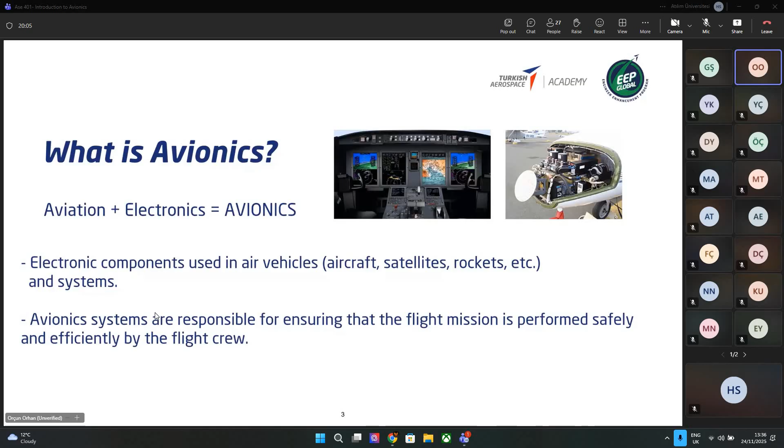A little bit of history. The Wright brothers, as you already know, are the first ones to actually make a successful flight with a heavier-than-air aircraft. It was the first one in the history of humankind, which is kind of important for us because with those improvements, aviation systems actually started to grow.

The second part is World War One. Why is it important for us? Because during World War One, there weren't many avionic systems used inside the aircraft. The pilot was trying to navigate through actual visual sight, and would just try to move the aircraft. Why they were using the aircraft was just to get information from the other lines, trying to understand what the enemy was actually trying to do, and then try to come back to their base and give the information. And then maybe some close combat, but there wasn't really much avionic equipment used in those aircraft in that era.

But the first important guy in history, we could say, is Lawrence Sperry, because we call this the first autopilot flight. Why we call it the first autopilot flight is because in 1914 there was an air show in Paris, France, and Lawrence Sperry had a gyroscope in his aircraft's system, with a lever connected mechanically to that gyroscope. During that air show, he flew his aircraft without actually controlling it. The aircraft was just moving in a stabilized way, getting its direction through the gyroscope. So in history, this is called the first autopilot system. It's not, of course, like the autopilot system we use nowadays, but it is a system controlled by a gyroscope, not by a human. That's the reason it's called the first autopilot flight in history.

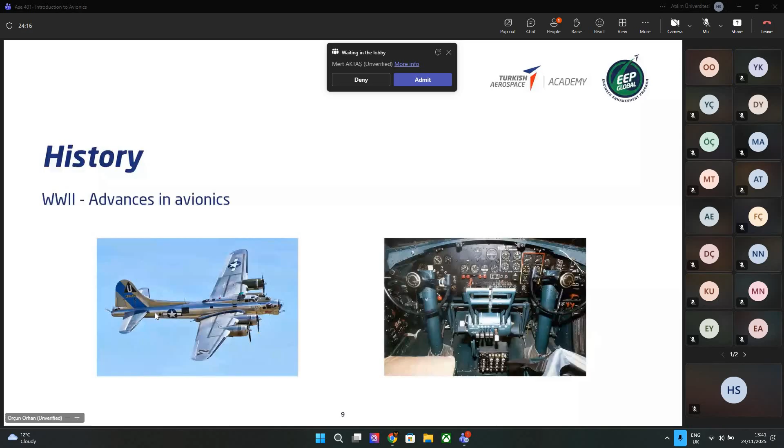Navigation systems, like the one shown in the right picture, also started to be used during the World War II era, and we'll go into a bit more detail about those during the course. But most of the systems we use nowadays also started being used in World War II, so that was an important era for avionic systems.

Fly-by-wire, why do we call it that, and why is it important? Is there any question? No, I think it was a mistake. Okay, so I'm continuing then.

Fly-by-wire is also important. Before fly-by-wire systems, all control surface controlling and aircraft systems were controlled mechanically, not electronically. But when fly-by-wire systems started to be used, like in 1987 in the Airbus and 1994 in the Boeing, controlling systems started to become electronic rather than mechanical. You give mechanical control inputs, but every surface is commanded by electronics.

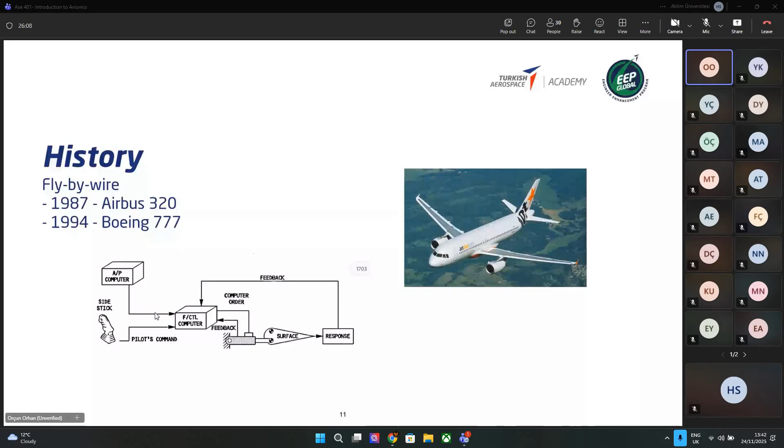Another important part is GPS satellite navigation. Why is it important? Before GPS, we were always trying to get our navigation through the ground, using beacons on the ground to understand our location in the air. But with GPS, we started getting our location through satellites in space. This was an important era for navigation, and it improved location finding for aircraft more easily.

In today's conditions, we can say it's not possible for an aircraft to fly without avionics, because we have fly-by-wire systems, motors, and everything relying on avionic systems. If there's no avionic system inside an aircraft, it's not able to fly. So we can easily say it's not possible for an aircraft to fly without avionic systems in today's conditions.

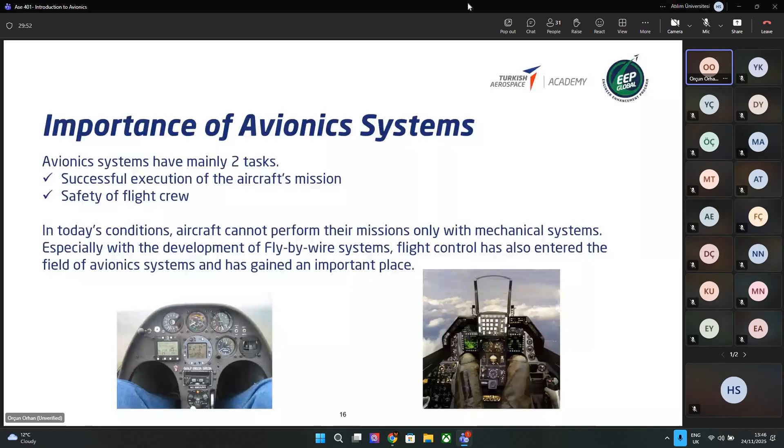We have the ATA classification, which is the avionics system classification according to the Air Transport Association. There's a numbering system for specific systems. For example, ATA22 is the automatic flight control systems. ATA23 is the communication systems, with subsystems like radios, locators, and radio control panels. ATA34 is the navigation systems, including radio navigation, inertial navigation, landing and takeoff systems, or air data systems.

Why do we do this classification? Because aircraft are really big, you need to classify subparts so that when you're designing, you understand what parts you're designing, and there's a common sense. This is why we use the Air Transport Association's classifications for our aircraft designs.

So what is control theory? In the basics, control theory is about building a controller to control a system. There should be a system designed before you, and as a controller, you try to create a controller on that. What the controller tries to do with a given input is get that system to a desired output. For that, there should be sensory systems that can give feedback. If there are measured outputs with those sensors, and it's fed back to the reference, that means this is a closed loop.

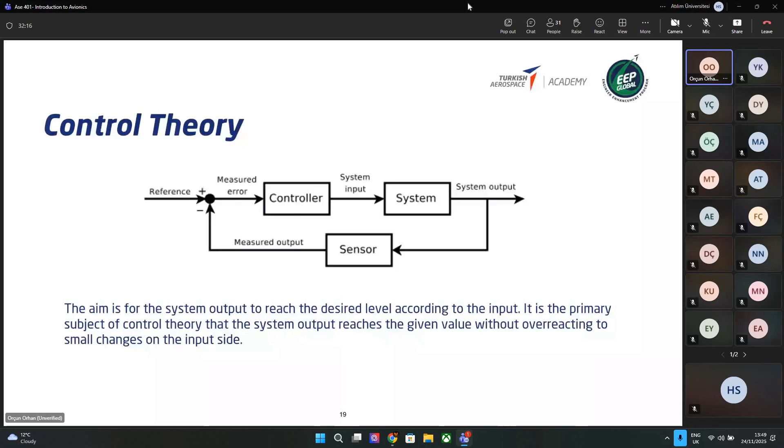For our systems, what the controller is actually trying to control are the control parameters, which are the elevator angle, rudder angle, aileron angle, flap angle, and the thrust quantity. These are the control surfaces and the motors. With that information and those inputs, you will actually try to control your aircraft in the air.

So what is a cockpit? Actually, the cockpit is the section where the aircraft is controlled and managed. It could be on the ground for UAVs, or inside the aircraft for fighter jets or other aircraft. This is the area where all the aircraft information is shown to the pilots. Through feedback sensors or screens, we give all that information to the pilots so that they are able to fly the aircraft.

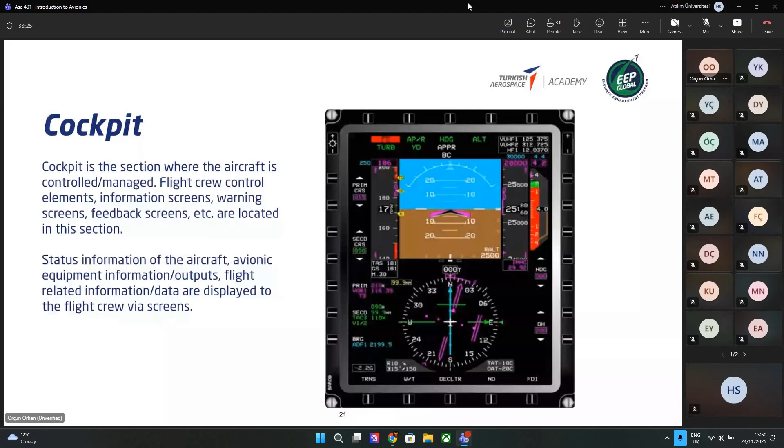Through history, there is a simple T organization that is used in the old times, but also nowadays. We just try to follow the simple T organization in those screens that we are giving information to the pilots. What is the simple T organization?

There is a T shape. All this information is shown to the pilots. On the left side will be the airspeed indicator. On the right side, there will be an altitude indicator. In the middle, there will be an attitude indicator, and then the heading indicator. So all four pieces of information are shown to the pilots with a T organization.

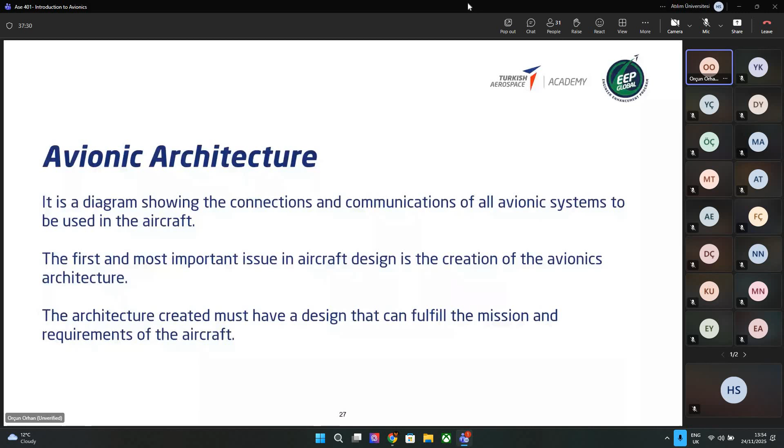So the paths followed while creating the aircraft, as we always say, start with examination of the aircraft mission and requirement set. According to that, you determine what equipment you are going to use, then select the suitable equipment that can fulfill the specified functions, and determine the data paths between the selected equipment - which equipment gives information to what, and how those equipments get their power and from where.

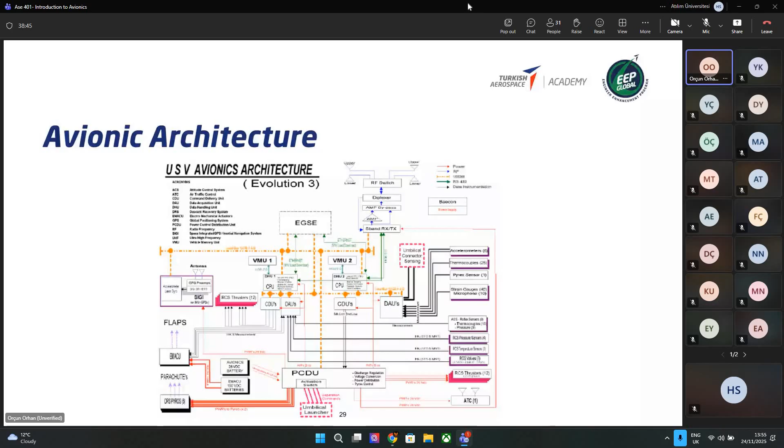So today we are categorizing all of our avionic architecture into three main headings. First one is the central architectures. The second one is the federated architectures, and the third one is the modular architectures. But there is also another one, distributed architecture, which we are not using anymore in our aircraft, but this is the old way that we were using.

So what is a distributed architecture? It's the most primitive and simple type of architecture used in aircrafts. There is no connection and communication between the avionic systems. The only connection between the avionic systems is the human factor, which is the pilot. So all these systems are just separately showing information to the pilot, and the main processor in the aircraft is the pilot. He's processing all this information and then making a decision about what to do, how to control the aircraft, how to control the control surfaces or the motors, and then applying them through using some mechanical levering.

So there is no connection between the systems. No system is giving any information to each other, only giving information to the pilot. That's why we say that it's distributed. Everything is distributed and then gives information separately to the pilot. So in this architecture, the main part is the pilot. He's the main guy.

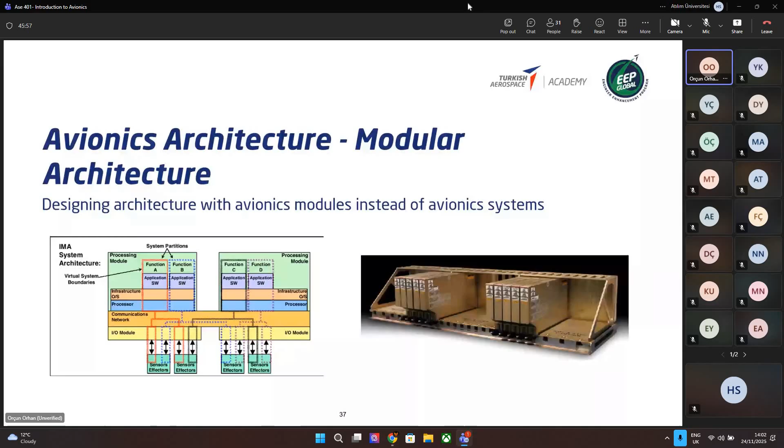You can think of it like the IT department of your system. There are modules, and if there's a failure in a module, it will be easier to debug and you can easily change them. But of course, in nowadays architecture, it's not just modular architecture or only federated architecture — there are combinations. In the aircraft, there are still some modular architectures, federated architecture, and also some central architectures, all combined together and used in aircrafts.

So data buses, we will start talking about. What is the data bus? As the name already tells, it's the channel that is used for the avionics systems to give information to each other, to communicate. It is like a nervous system, you can say — all the communication and data transfer is carried out through these channels.

If there is any failure in the system, in the communication, then there is no information going through from one system to the other. So there should also be backup channels for every data bus, because if you only have one data bus between one device and another, and it's an important data bus for your information, if there is any failure in that data bus, there is no way to give that information to the equipment that is needed. But if there is a backup channel, then if there is any failure in the main channel, you can send your information through the backup channel. So there is always a necessity in the aircraft to design with backup channels, with backup equipment.

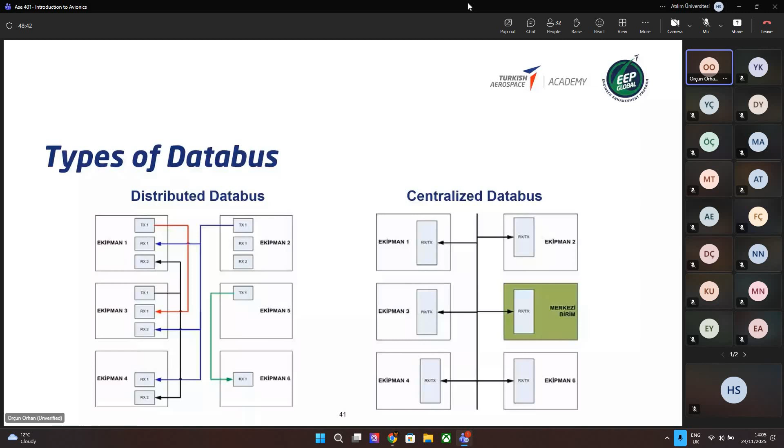But what is the centralized data bus? There is only one data bus in your system — only one line, one channel — and all the equipment is actually connected to that channel to give and get information. Instead of distributing and dividing every connection separately, we are centralizing every connection in the centralized data bus.

So what are the advantages? It's standardization, fast data transfer, easy and fast implementation, and ease of error tracking.

Because if you have multiple wires connected between different equipments, it will be harder for you to find a bug. If there is any problem, you need to follow the cable from which equipment is actually going to where, and then understand if there's a failure in that part or any other parts. So it will be harder to detect a bug. But in the centralized one, because every equipment is connected to the same line, it will be easier to understand what the failure is.

So in aircraft systems, there are generally 2 data buses used. The first one is the military standard 1553, and the second one is ARINC 429. We will just talk about it a little bit, we will not go into details.

The first one is the military standard. As the name suggests, it is a standard used in the military, developed by the US Air Force in 1973 for faster and easier data transfer between systems. You can see it used in the F-16 aircraft, and some other versions are used in F-16s or the Apache helicopters. This is the standard used in the military.

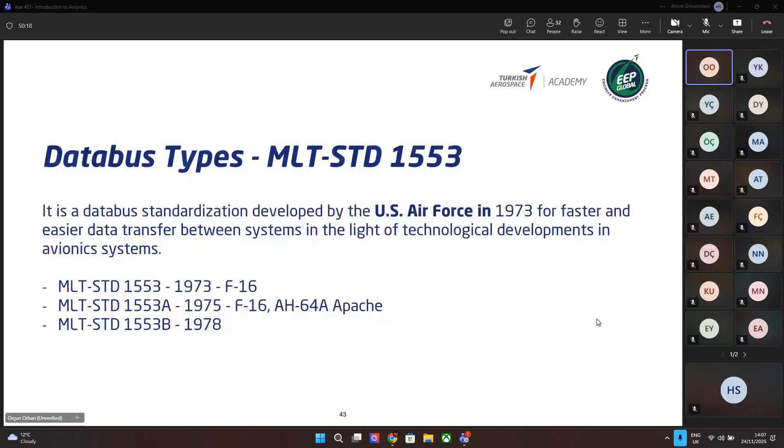Let's not get into too much detail because it will be too confusing. But what is important is what we call a half duplex system. So what is a half duplex system? Through one line, at the same time, data can only be sent in one direction. So if one equipment is sending data to others, you cannot send information back through the same channel. This is what we call half duplex.

But if the technique is full duplex, then you can also send information in both directions.

So what we are doing is at one time, only one system is sending data from one place to another, and this should be controlled by some entity. This is why we have a bus controller, which controls all the bus. It sends signals to the equipments to tell them which equipment needs to send data to where. So at one time, only one equipment can send information through that bus, and there shouldn't be any information sent back to the same equipment at that time.

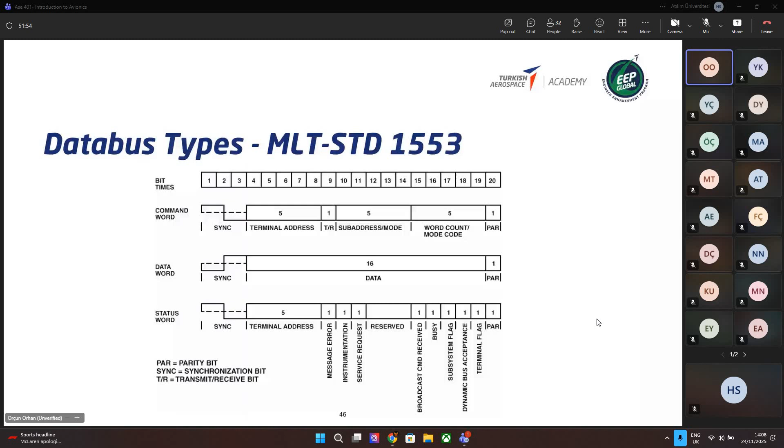Let's go over those - these are kind of the details of the system, so you shouldn't go too deep. So what is ARINC? The second data bus is the communication protocol used for civil aviation, not military aviation, because using military aviation standards in civil aviation is kind of expensive. So they came up with a much simpler protocol to be used in civil aviation.

So in the military, there should be a controller actually controlling which equipment is sending the data. But over here, there is no controller - there is only one transmitter in the system, and this is the only one sending information to the others. There could be some receivers, up to 20 receivers connected to the system, but only the transmitter is sending data - the receivers are not sending data. So this is much easier and much less complex design compared to the military standard protocol, because in the military standard there could be a controller controlling the system.

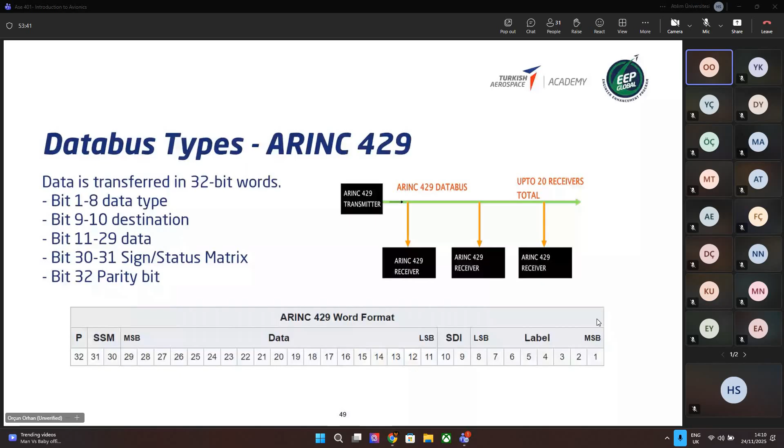So as we said, these are the two data buses used generally in the aircraft. Military standard is used mostly in the military section, but the other standard is used in civil aviation.

So let's start talking about the avionics subsystems. What are they? They are the human-machine interfaces, like the display systems, communications, and data entry control, flight control systems, because there is an interaction between the human and the machine. The machines will be the screens or the controlling parts, like joysticks that you're using to control your aircraft, or screens or keyboards that you're using to enter information into your systems. This is why we call them human-machine interfaces, because there is interaction between the human and the machines. The other subsystems will be the air data inertial systems, the navigation, the communication and surveillance systems, and the automation systems.

First, we will talk about the air data and inertial systems. This is the information necessary for the flight crew to perform its flight safely. This is the most important data that a pilot needs during its flight. We categorize them under three main sections: the first is altitude, the second is airspeed, and the third is air temperature.

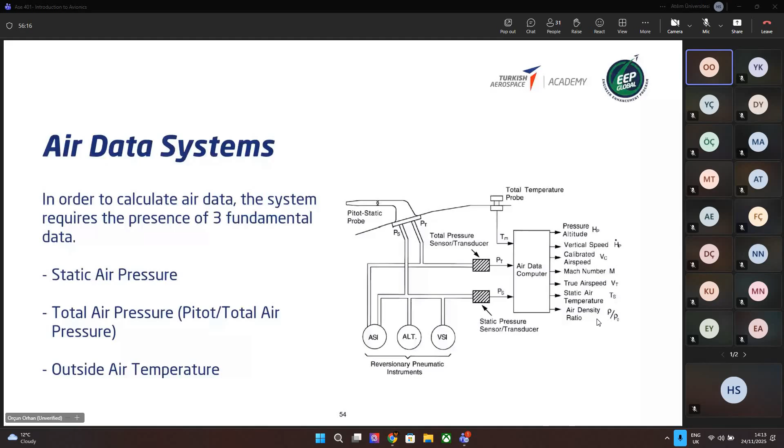So as we already said, this is the pitot tube that gets the air pressure information, and then a temperature sensor that is used to understand the outside temperature around the aircraft. These are some of the air data computers used in some projects, also in TUSAŞ and other companies.

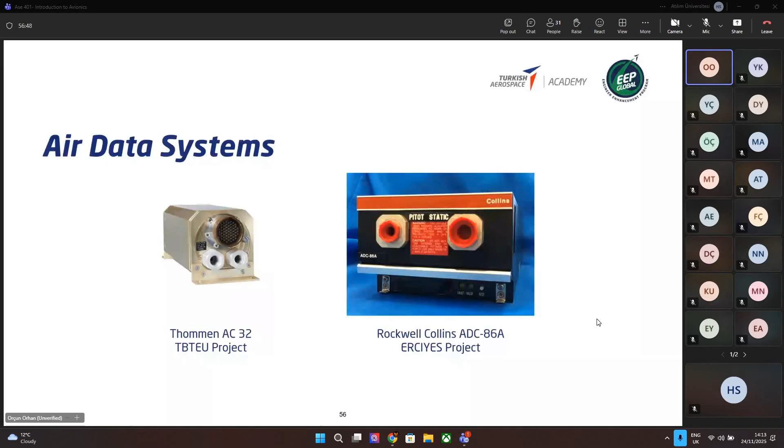The importance of this data for the flight crew is that with the calibrated speed information, the dynamic pressure on the aircraft can be obtained. From this, the forces and moments acting on the aircraft can also be calculated. So when pilots are controlling the aircraft, they try to understand how it will behave if there are more forces coming from one side, the wing, or the tail section, and will perform a maneuver according to those forces. So the controllability of the aircraft is affected by that data.

The altitude information is also important for a safe flight, because some aircraft crashes have happened due to wrong altitude data. If the pilot doesn't know he's flying really near to surface areas, whether it's a sea, a mountain, or any landscape, and doesn't get any information about the altitude or any vision from the outside world, he cannot understand how he's actually flying. There have been accidents in the past where the pilot doesn't get that information and then crashes the aircraft. So this is really important information for pilots to fly the aircraft safely.

Again, this is important not just for the pilots but also for the subsystems, because the subsystem also uses this air data information to calculate other information and then show it to the pilot. The reasoning is the same: if you're getting wrong data, your calculation will be wrong, and you will show wrong information to the pilots, which will affect flight safety.

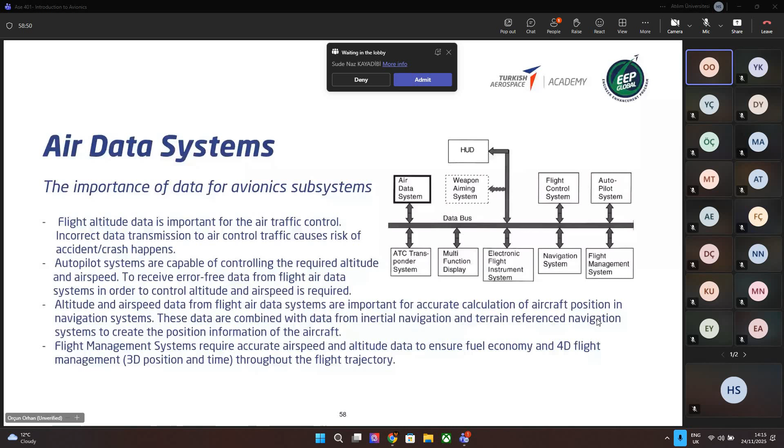There's an inverse relationship between altitude and static pressure. If you are gaining altitude, the static pressure that you're inside will actually be decreased. The reason is that there will be less air on top of you, so less air is pressurizing you. That's the reason for the decrease in static air pressure if you gain altitude.

There are two types of altitude values. The first one is the barometric altitude. This is the altitude measured with reference to sea level. So whatever you're calculating for barometric altitude will be your altitude according to sea level. After the aircraft lands at the airfield, the value taken from the barometric altitude will be the altitude of that airfield.

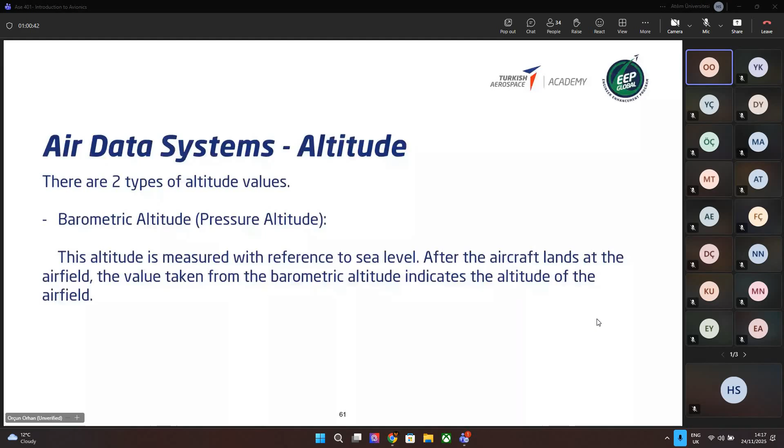The second one is the barometric corrected altitude. For example, if you don't want to get an altitude value according to sea level, but to the airfield's altitude level, what you need to do is understand the barometric altitude of that airfield through the barometric altitude level, and then give that information to your system so it can directly calculate your altitude according to the airfield, not the sea level. This will be your barometric corrected altitude.

The airspeed, the most basic airspeed velocity, is calculated based on the difference between the total air pressure and the static air pressure. This is the generic formalization of that. The airspeed you are going to calculate will be in knots, and PT and PS will be the total air pressure and the static air pressure.

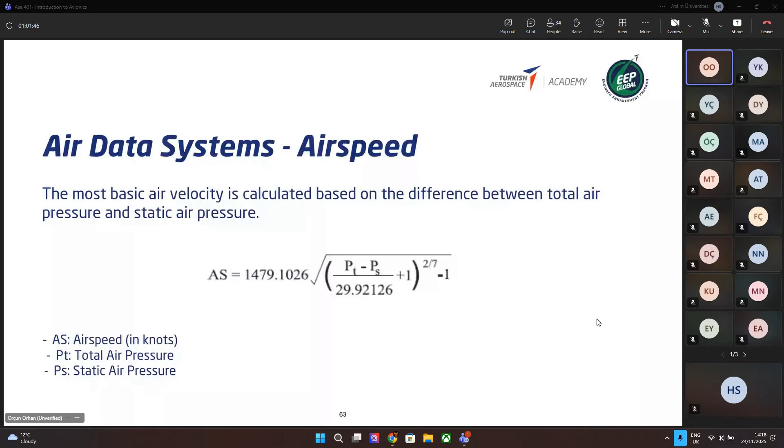There are 5 types of airspeeds that we use in the aircraft. The first one is indicated, the second is calibrated, the third is equivalent, the fourth is true airspeed, and the fifth will be the Mach number.

Indicated airspeed is the speed of the aircraft relative to the surrounding air mass. This is directly calculated using the static air pressure and the total air pressure shown in the first formalization.

When you want to use calibrated airspeed, this is the airspeed obtained by making aircraft-specific adjustments to the IAS information. You first calculate the indicated airspeed, then you calculate the calibrated airspeed. Those specific adjustments are like the pressure losses experienced according to the placement of the sensor. You're putting your pitot tubes around your aircraft, mostly on the fuselage part, but you don't know exactly if that information is correct or not. So with experiments conducted before the flight for your aircraft, you try to understand the correctness of the information through every pitot tube placed on your aircraft, doing that adjustment to understand the airspeed information.

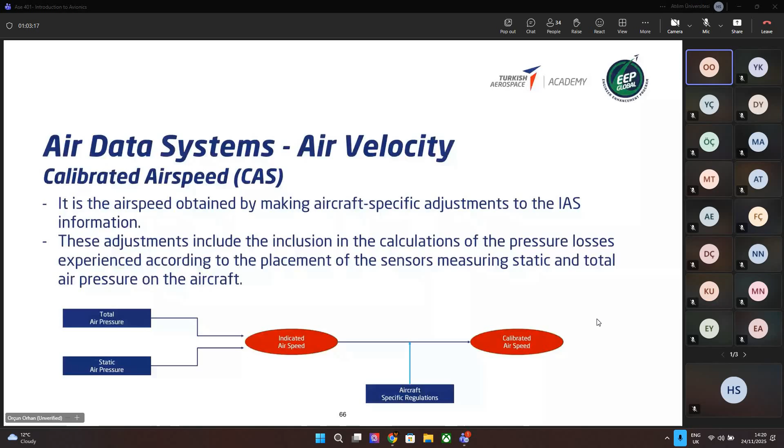The third one is the equivalent airspeed. This is a theoretical airspeed used by the aircraft designer, not by the pilots. The pilot doesn't use that airspeed to decide on anything. This equivalent air velocity is obtained by adding the density and compressibility data of the air surrounding the aircraft.

The fourth one is the true airspeed. What you're actually adding as the last piece of information is the temperature around the aircraft. When you add that information also to your equivalent airspeed, you come up with the true airspeed information. The last one is the Mach number, which is obtained by dividing the true airspeed by the speed of sound.

The air temperature is one of the 3 values that we need to sense on our aircraft through the sensors. There are 2 kinds of air temperature: the first is the static air temperature, and the second is the total air temperature.

Static air temperature is the temperature around your aircraft, so it's not going to change; it's just the air that has that temperature around you. But the total air temperature is, when your aircraft is actually flying through the air, there are forces also acting on the air around your aircraft, which actually heat the air all around it. So this is the total air temperature, not pressure, that you need to calculate.

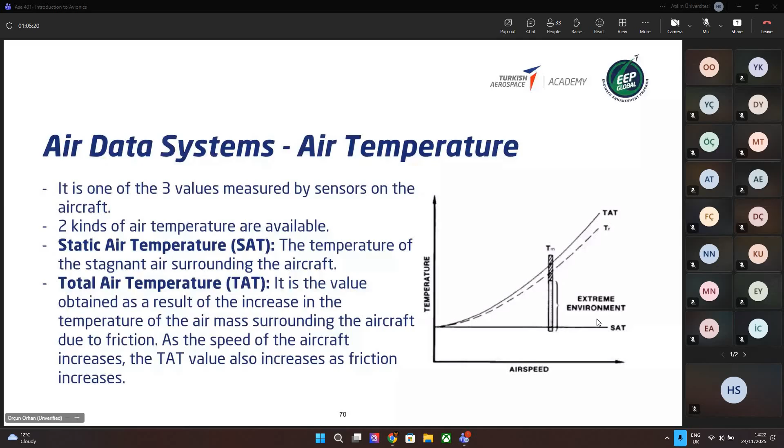Air data systems try to get three important pieces of information through its sensors. The first is static pressure, the second is total air pressure, and the third is temperature. All this information is processed in the ADC units to calculate velocity and temperature information for the pilots, and it is shown to them so they can fly the aircraft safely.

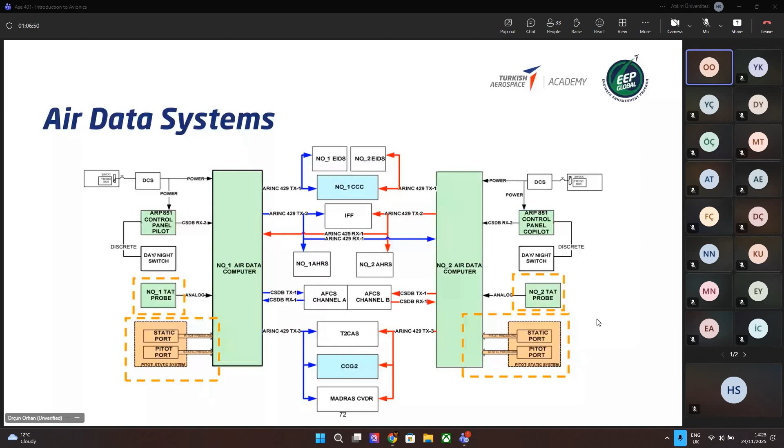Heading and situation information systems are what we call AHRS, the attitude and heading reference systems. Like the air data system, it provides necessary information for the flight crew to fly the aircraft safely. We categorize this information under three sections: first attitude, second acceleration, and third heading, the magnetic heading.

To calculate this data, we need different kinds of sensory systems, and the system receives information from three different sensors. The first is the accelerometer, which gives acceleration through three axes, X, Y, and Z. The gyroscope gives you the spin according to the same axes, and the magnetometer provides information on how your heading is relative to magnetic north.

For the heading and situation information system, the first is situation - how your aircraft is looking toward a certain direction. This is calculated by measuring the rotation around three axes. You get this information using the gyroscope, because it tells you how much your aircraft is rotated around one axis. With a gyroscope giving rotations around three axes, you get the situation information about your aircraft - in which direction it's rotated and in which direction it's looking.

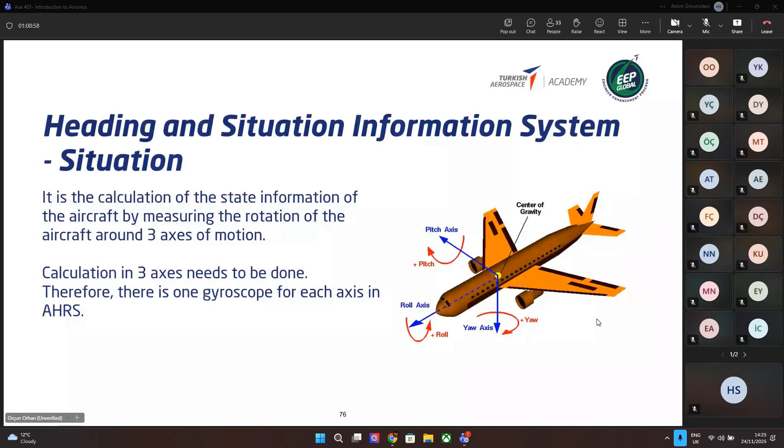For acceleration information, if you know the attitude of your aircraft - where it's looking - you also know its X, Y, Z axes. What you need to know is how your aircraft is accelerating through those axes. If you know that, you know the speed of your aircraft - in which direction you have what kind of speed, and in which direction you are going. This calculation needs three axes as well, so with an IMU sensor you get three different acceleration values for three different axes.

Again, the heading information tells you how your aircraft is headed, in which direction it's going according to magnetic north.

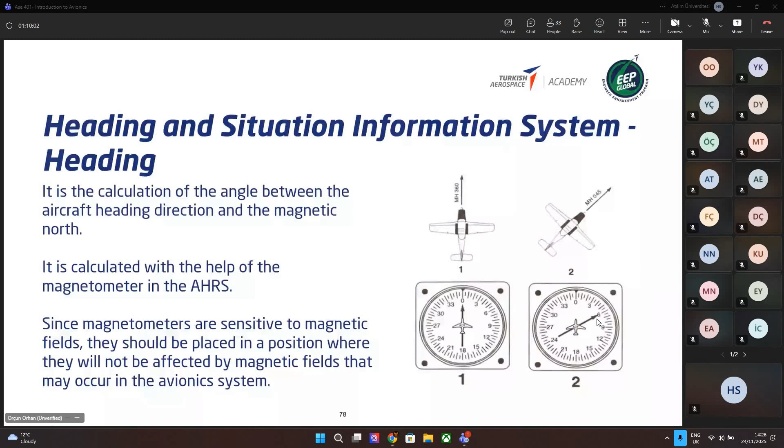This is again a system that is providing heading and attitude information to your subsystems. So how is it actually going to get through three different sensory informations like IMU sensors, gyroscopic sensors, and the magnetometer sensor? It's going to get all these three informations and then try to calculate an attitude, velocity or acceleration, and then the heading information.

After calculating all these informations, what you need to do is display them to your pilot. The pilot could be on the ground for UAV systems, where there will be a ground control station in which all the information is provided to the pilot, or it could be a cockpit where your flight crew, your pilot, will be inside of your aircraft.

And the flight information to the flight crew through visual means means the mission can be accomplished safely and successfully. For that, you need to show some primary flight information, navigation information, engine data, airframe data, warning information. The most important will be the primary flight information, because if the pilot doesn't know those, it cannot fly the aircraft. The other information, like navigation, is of course important, but it's kind of extra information for your pilots to have.

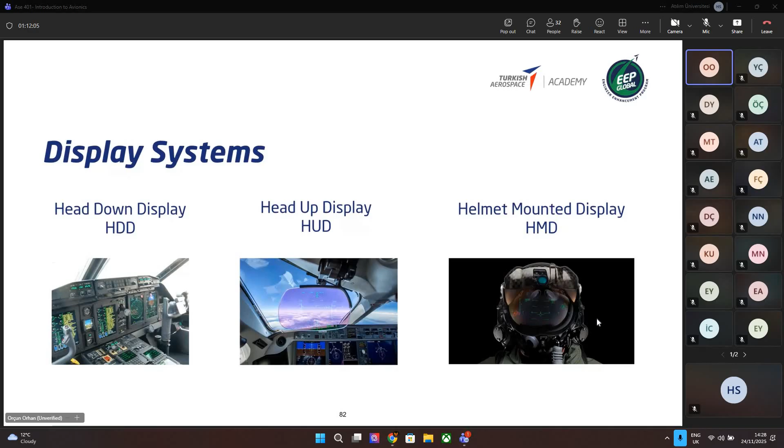For the display systems, we are dividing them into three categories. First will be the head-down displays, which are the basic displays shown in the aircraft. Head-up displays will be the more advanced display systems used also for civil aviation and military aviation. The last one will be the helmet-mounted displays, which is mostly used in the military section and not used in civil aviation.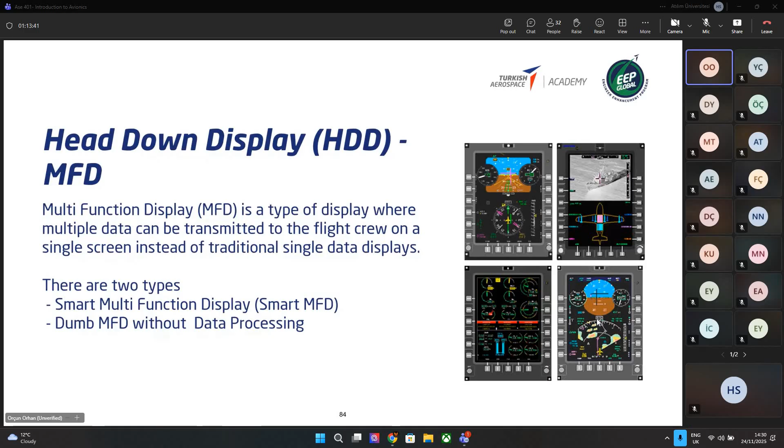So there are two types of those screens. The first is the smart multifunction display, and the other is the dumb multifunction display without any data processing. As the name suggests, the smart one actually gets the data and processes it by itself, getting raw data, processing the information, and showing the necessary information to the pilots on the screens. But for the dumb ones, there is no processing capability, so they just get the processed data and show it on the screens to the pilots.

These are the technologies that have been used in the old times and nowadays. The first is cathode ray displays, which are big screens, much heavier, and they got heated more in the old times. These are like the televisions we used in our childhood and in the past. Nowadays there is no usage of them in the aircraft or in our daily life.

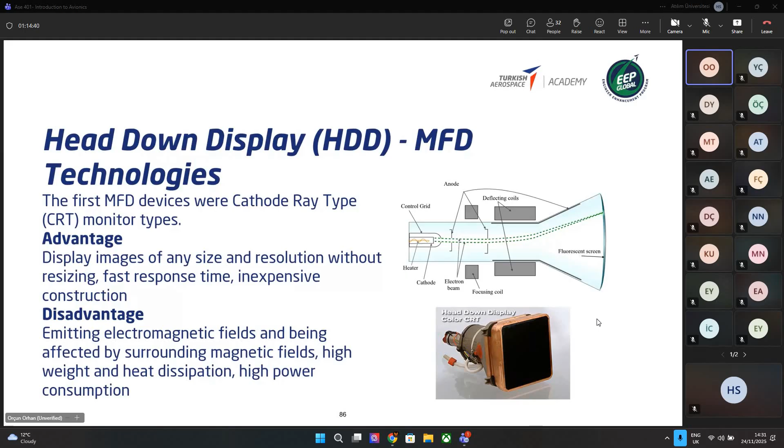What they came up with mostly is the active matrix liquid crystal displays, like LCDs. Nowadays in our homes or elsewhere, what we are using as a screen is the LCD. Also in the aircraft, most of the information is shown through LCD screens. This could be a future idea, although it mostly uses MFD technology, but OLED screens can also be used. Right now it's too expensive, so there isn't common usage in aviation.

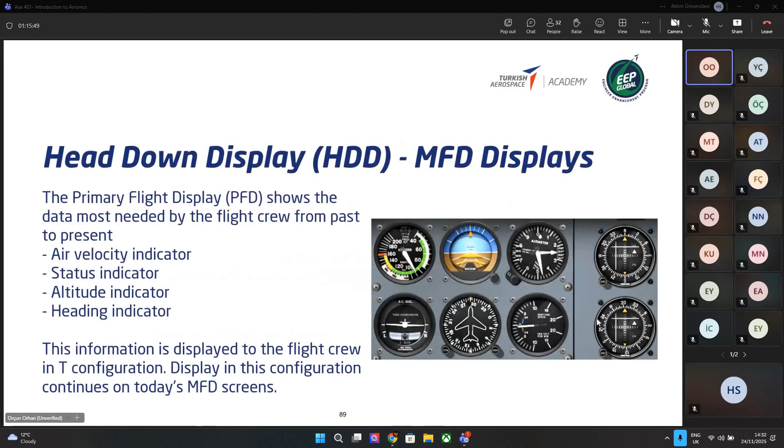So what we have is the primary flight display. We already talked a little bit about it before, like the basic T configuration. On the left side we show the airspeed, on the right side the altimeter, and in the middle the heading and status indicator as information to the pilots. In the MFDs, it will be the same as we already talked about: on the left side the speed, right side the altitude, and in the middle the status and heading information.

And we are just going to divide it into two sections: the attitude direction indicator part and the horizontal situation indicator part.

The first one will be the attitude and direction indicator, which will show the air velocity, attitude, altitude, vertical speed, and direction angle of the aircraft on the upper part of your screen. There's an image on the right side showing the attitude direction indicator on top, and the horizontal situation indicator below, which gives you the compass display, approach information, and navigation information. So the upper part will be the ADI and the lower part will be the HSI.

The upper part's information will come from the air data, which will be the airspeed, altitude, and vertical speed information. The other information will come from the status data that we will talk about - the air data systems and the AHRS systems. These two systems are actually going to provide all the necessary information to be shown on the MFDs.

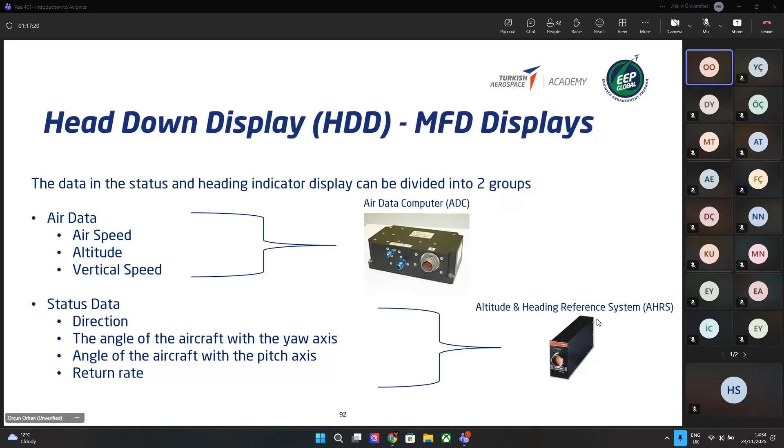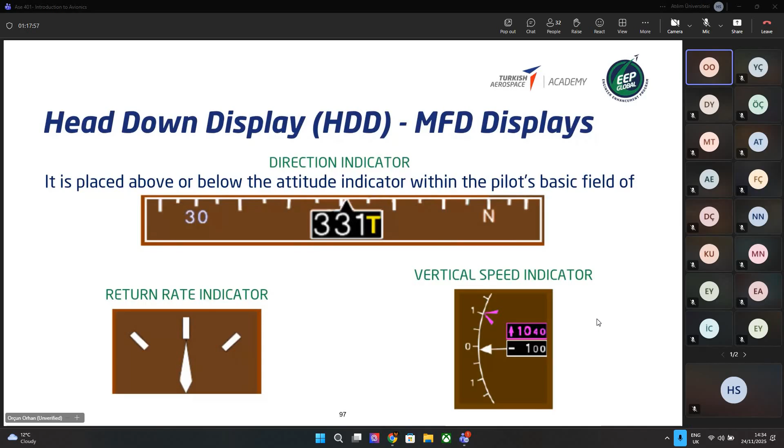Let's not go into too much detail, but there's speed information shown on the left side of your MFD. On the right side, there will be the altitude band showing altitude information. In the status indicator, this is like the basic T organization, it will be in the middle. There could be some directional indicators also, like the return rate indicator, vertical speed indicators, and direction indicators that can be shown also on your screens. But again, this is the general way of showing information on the MFDs to the pilots.

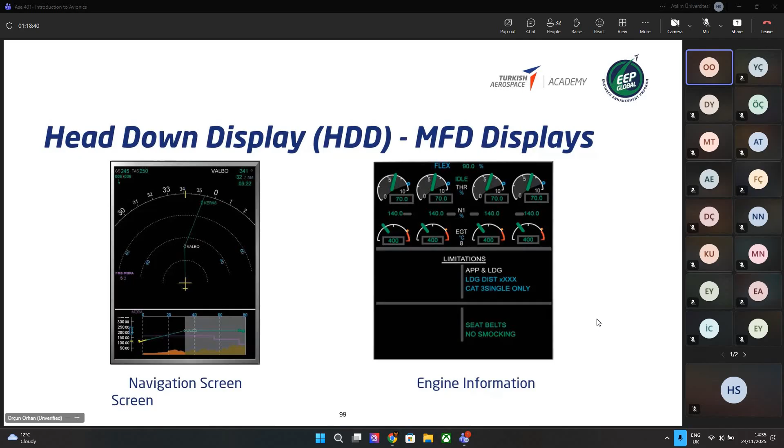After showing primary flight information data to the pilots, you can also show other information to the pilots. It could be like the navigation screens or the engine information screens. For example, on one side you're seeing radar information shown on the aircraft to the pilots, and on the other side there's engine information shown to the pilots - an engine indicator. These are screens that you can design according to whatever information you want to show the aircraft and the pilots. If you have the necessary information through your subsystems, you can easily design those screens and show whatever information you want to the pilots.

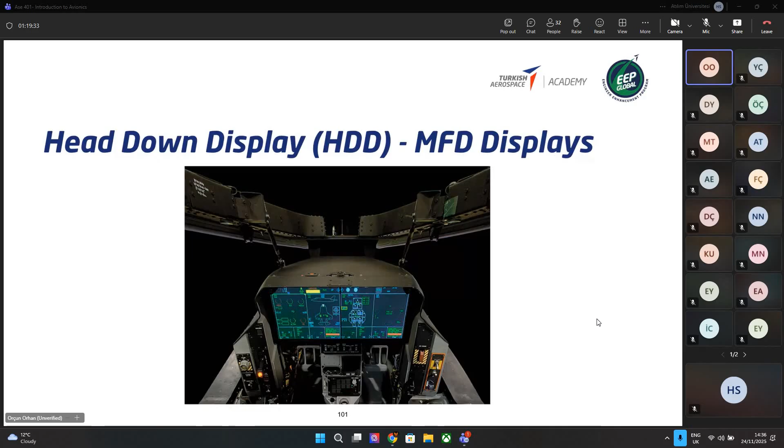So this is the inside of an F-35. As you can see, there are only screens - not just buttons. Of course there are some buttons on the right and left side, but the main part is just the big two MFD screens, and all of this information is shown to the pilots through those screens. You can just get whatever necessary information he needs for the aircraft to fly safely.

For the head-down displays, what we have is the backup flight indicators. Why do we need it? Because if any of those main indicator screens have a malfunction, or if there's any malfunction in the information coming to those screens, what the pilot is going to need is a backup flight indicator. This is information that needs to be shown to the pilots for safety operations, and it will be the basic flight parameters - the primary flight parameters, which will be the status, airspeed, and altitude information shown. It will be the same organization, like the T-shape organization used also on the MFDs, and it will be the same on the backup flight indicators.

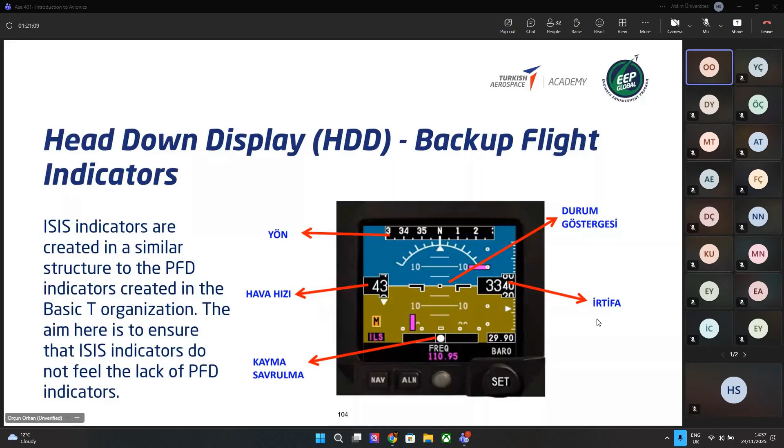Let's not go into too much detail. On the head-down displays, there are some warning panels. If there's any critical warnings or any failure in your aircraft, these are the panels that show the information to the pilots.

Of course, there are some master cautions and master warnings. If there's a caution, it means it's just showing the pilot that there is a failure in one of your subsystems, but this is not a real main failure. So you need to be careful about it, but you need to also give information to the pilot. But if it is a warning, it means that there is a failure in one of the subsystems which can affect the flight of your aircraft. So you need to show that information to the pilot, indicating in which subsystem the failure is happening.

Also, the most important part is the fire part. If there is any fire, that definitely affects flight safety. So you need to show that information to the pilot.

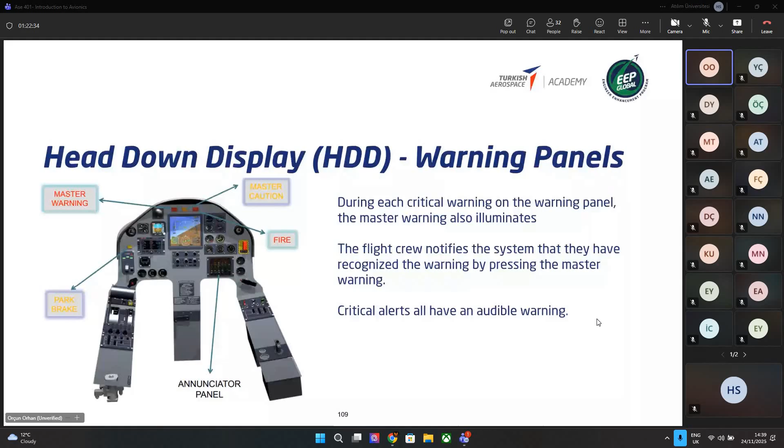So some of the avionic architecture of warning panels shows which subsystem is actually connected to which warning indicator in your aircraft. We are also showing it as an avionic architecture.

Another one is like the engine indicators. We already shown some of those. You can also give some engine information to the pilots just through the indicators.

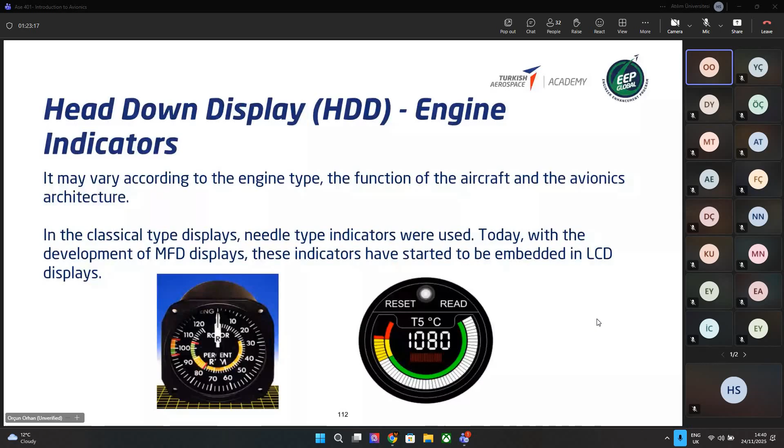The information that you want to show could be different for different kinds of motors. Some of them, for example, is like some level of temperature that needs to be actually worked on. If there are some levels that are just too much for the aircraft, you need to show it to the pilots so they can work with the aircraft safely.

So let's talk a little bit about the head-up displays. The first one we talked about was the head-down display. So these are all the necessary information that's shown to the pilots through the MFD sequence.

This is a head-up display, but what is the reason for having a head-up display for the pilots? For the head-down display, the pilot needs to look at the screens to get the information, and when they're looking at the screen, they lose visual contact with the real world around the aircraft.

So what is the reason that we come up with a head-up display? When the pilot is actually looking through the window at the area around, he can get the same information, the same primary flight information, through those screens. So it doesn't need to lose contact with the real world. It can also get that information while looking through the window. So this is the reason they came up with head-up displays, for the safety of flight operations.

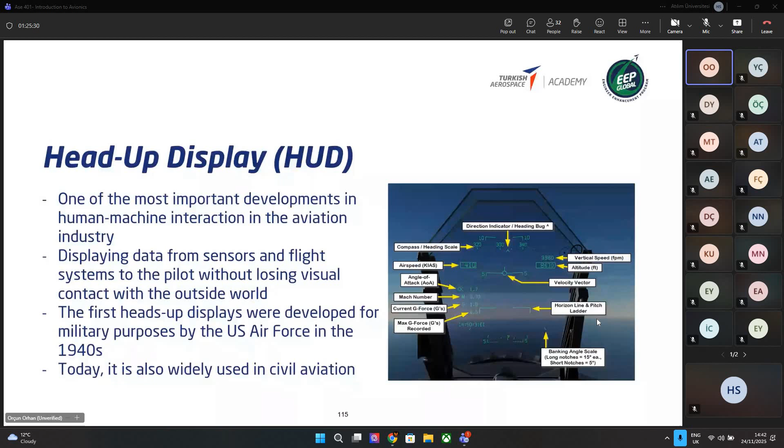Pilot display unit, control unit, and power unit. The pilot display unit is what you're seeing here, the screens that show the information. The control unit is what the pilot uses to control that information - what kind of information he wants to see on the screens. And the power unit is the general unit that gives power to the head-up display.

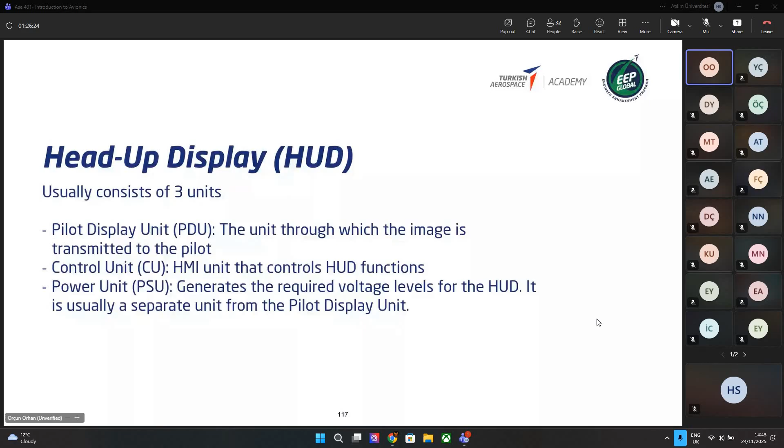We will not go into the details of how those images are actually shown on those mirrors and screens. This is a little bit too advanced for you, so we will just go through those.

So the last part will be the helmet integrated display. As we said, the first part, the head-up display, is also used for the military, but it's mostly used in civil aviation. But the helmet integrated part is the reverse - it's mostly used in military, not in civil aviation.

What is the difference between the head-up display? Head-up display is just a screen that is locked, so if the pilot wants that information, he needs to look through that screen. But the helmet integrated display shows the same display as the head-up display, but it is integrated into the helmet of the pilot, so whenever he turns his head, it's actually also turning that screen, so they will always see that information.

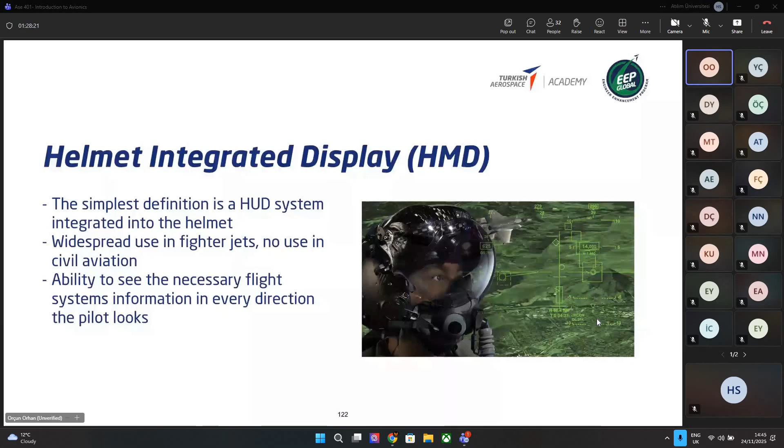So when you compare the head-up display and the head-mounted display, the head-up display can only display the flight data when looking in a specific direction, but the head-mounted display will always give you the data wherever direction you're looking. The head-mounted display definitely has a wider field of view, and it is a much more complicated system compared to the head-up display.

When designing, there should be some helmet design factors, because this time the pilot is actually putting that helmet on top of its head. So it should have features to protect the pilot's head also, not just give information, but it should also protect the pilot's head in emergency situations.

The systems providing oxygen to the pilot must be integrated. The necessary equipment for the pilot to communicate with the ground station and other aircraft should be in the helmet also.

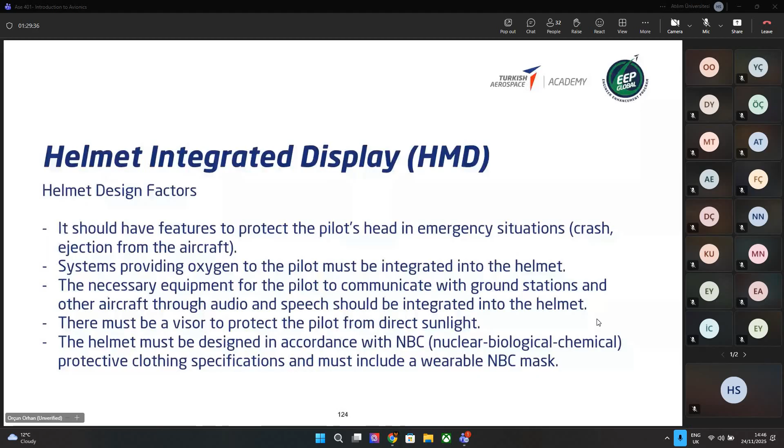The last information we're going to give is the helmet integrated targeting. It's using the same helmet integrated display, but this is used to target any place or any aircraft around the pilot's aircraft. So when it's looking in one direction, it can try to get a target in that direction.

Again, in military aircraft, this is used because it will be easier for the pilot to have all these maneuvers and everything inside a combat area.

The other subsystem we will talk about will be navigation systems. What is navigation? In the aviation definition, it's the safe and shortest flight path a flight will follow from the moment of takeoff to the moment of landing. The exact position of the airplane on the flight path must be continuously monitored through references. This is the definition in civil aviation - when you're trying to go from one place to another, you need a safe flight and you need to know exactly the location of your aircraft.

Types of navigation - we have 3 different types of navigation systems. The first is terrestrial radio navigation systems, which gives information from ground beacons. The second is satellite navigation systems, where your beacons are in space, like GPS, and you get information through those space beacons. The last one is the inertial navigation system, where you don't get any information from outside - all information is calculated through the sensor system inside of your aircraft. So you won't get any information from outside, nor from the ground, nor from space - you calculate all positional information through the inner sensor systems inside the aircraft.

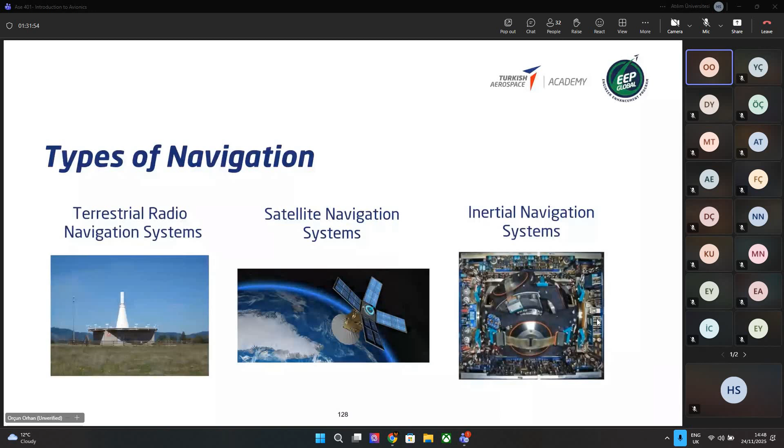The first one, as we already talked about, the terrestrial navigational systems - there will be some beacons on the ground, and you try to communicate with those beacons, and estimate your position according to them. This is how you can calculate the position of your aircraft. There are 4 different kinds of systems: the first is the automatic direction finder, the second is the very high frequency omni range, the third is the distance measurement equipment, and the fourth is the tactical air navigation.

The automatic direction finder is one of the oldest radio navigation systems used in aircraft. The broadcast from a non-directional beacon tower on the ground is detected by the automatic direction finder on the aircraft, and it shows the bearing of the aircraft relative to that beacon, the direction of your aircraft according to that ground beacon.

Of course, if you have just one beacon's information, you cannot understand the location of your aircraft. So what you need is at least two different beacons, to understand the bearing of your aircraft according to those beacons. What you can do is draw a line, because if you know the degree of the bearing according to that beacon, you can draw a line from that beacon to that location. And if you have two lines from two different locations, the connection point will be the location of your aircraft. This is the old system used in navigational systems in aircraft.

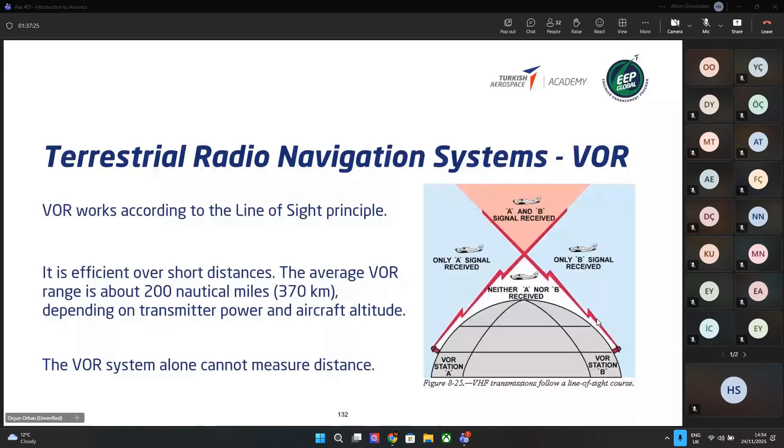So the third one will be the DMEs, the measurement systems. The aircraft sends signals, but with VORs and ADFs, you don't get any distance information, you just get positional information. So according to those beacons, you know where your aircraft is as a position, but you don't get any distance measurements according to those beacons.

But what the DME is, is the distance measurement equipment. In that one, your aircraft is going to send one signal to the DME beacon, and then that beacon is going to make a response to your signal. According to that, you will try to understand the distance between your aircraft and the DME station.

So what is TACAN? TACAN you can just think of as a military station where there is a VOR-like structure and a DME station at the same time. So if you just connect to a TACAN station, you can get the positional distance information from the DME, and the positional information from the VOR. So even if you just have one TACAN on the ground, if you can connect and get that information, you can understand the exact location of your aircraft.

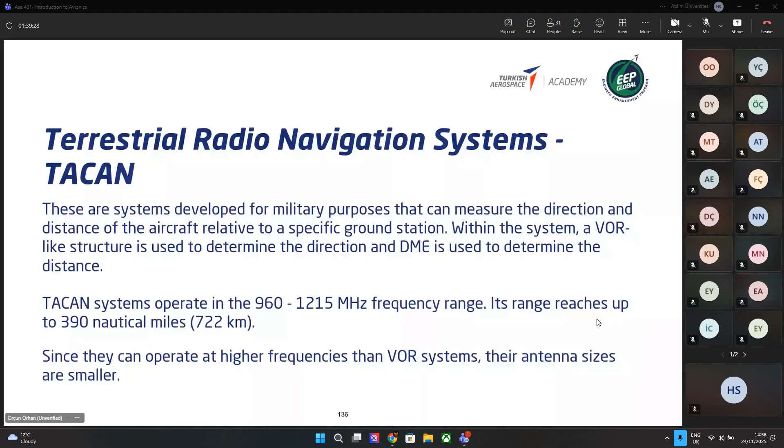There is also the radar altimeter, which gives you the altitude level of your aircraft according to the ground level that it's actually passing. It could be sea level, it could be any landscape, but wherever the aircraft is actually passing, if it is a landscape, it will give you the altitude according to that landscape. So it's not going to directly calculate a sea level altitude, it will just calculate the altitude according to whatever landscape you are passing through. It will send a radio frequency signal and receive that signal back, and according to the time passed during sending and receiving, it will calculate the necessary altitude information.

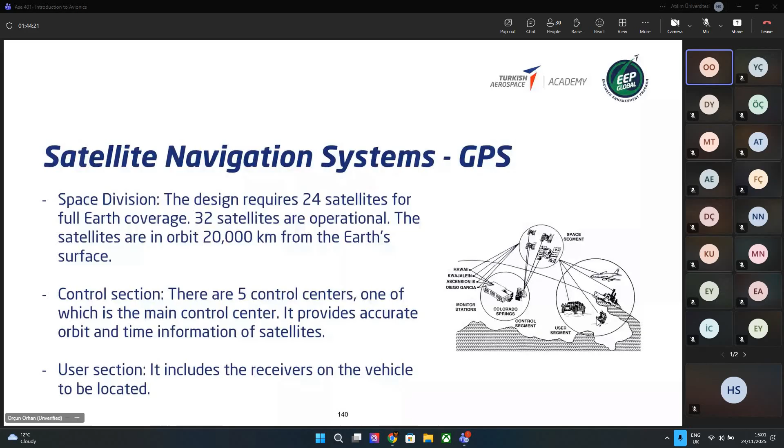How they calculate that is actually in space. If you know the exact location of 3 points, and you're trying to find the position of a fourth point, and you know exactly the distance between these 3 points and that fourth point, you can calculate it, because you derive 3 different equations with 3 different unknowns. With 3 equations you can easily solve for your 3 unknowns, giving you the exact location of your system in space.

But for GPS, what you need is a fourth point. So for GPS to calculate your exact position, you need a connection between 4 different GPS beacons. The reason is there is a time difference between your device and the GPS beacons' time. All these beacons have time synchronization between them because of the main controller, but your device is not synchronized with the beacons' timeline.

So in this case, you don't just have 3 unknowns, there are 4 unknowns — there's a time error, a time difference between your device and the beacons' times. For that reason you need at least 4 different equations. This is why you need 4 different GPS beacon connections between your device to calculate its exact location.

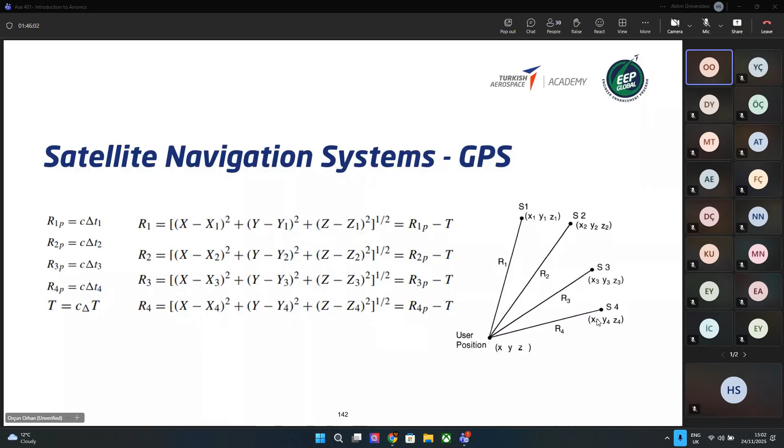The inertial navigation systems — what we taught for satellite and terrestrial needs information from outside of your device or aircraft to define its position in space. But for the inertial navigation system, you don't need any information from the outside world. It directly calculates the exact position of the aircraft through the inertial measurements inside the aircraft.

I mean, which will be autonomous — it directly calculates by itself. It doesn't need any information from outside, so it doesn't depend on any information from the outside world.

At the heart of those inertial measurement systems is the IMU sensor, the inertial measurement unit, which consists of an accelerometer, gyroscope, and a magnetometer.

According to that information, what you can calculate is the latitude and longitude of your aircraft, which are its coordinates — you can just think of it as the XYZ position of your aircraft in space — and your ground speed.

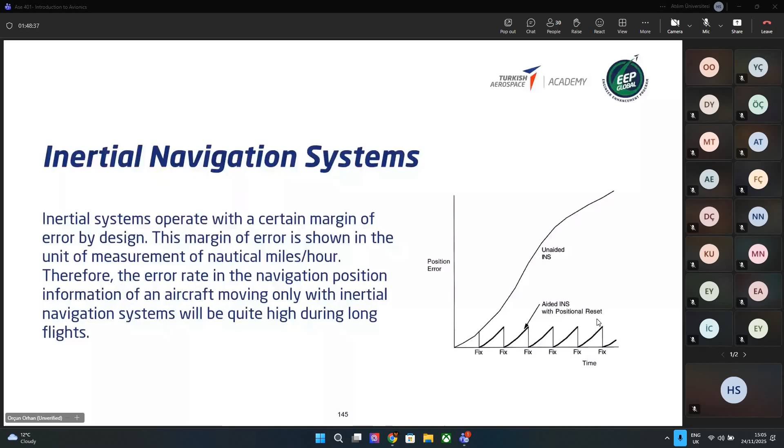But what they are actually trying to do is filter that data and decrease the error inside those inertial measurements. They do this through other positional data information, like satellite navigation information and terrestrial navigation information. So nowadays they don't just use only one navigation information like satellite or terrestrial — they try to combine all three to get much more accurate positional and velocity information about your aircraft.

So the part we're going to talk about is the communication and surveillance systems and subsystems in the aircraft. After the navigational systems, the most important part is the communication of the aircraft with the ground or any other aircraft around it. This means sharing air and operational messages, ensuring air traffic control, collision prevention, and acquiring knowledge about the aircraft's exterior - all this information actually gets to the pilots through those communication systems.

So what we are using is again the electromagnetic waves. Also for the navigational information, we were getting the radio electromagnetic waves. All that information is sent from the aircraft to those beacons and back through electromagnetic waves, and all that communication is also performed by electromagnetic waves - gamma rays, X-ray, ultraviolet, visible light, infrared, or radio waves. The radio waves are mostly used for communication, and we will see it.

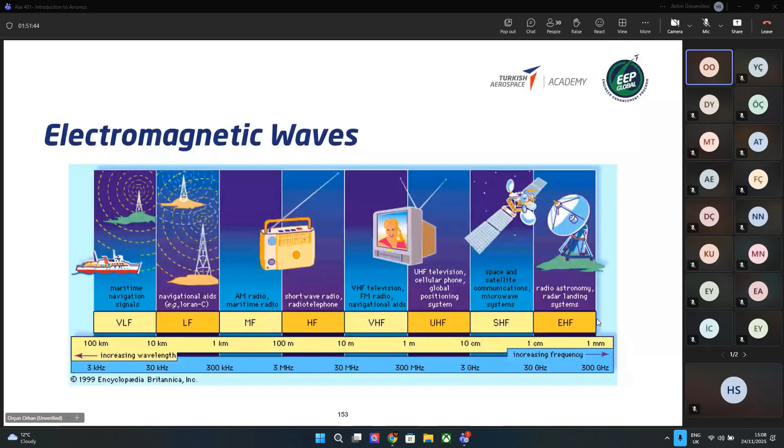High frequency communication corresponds to the high frequency range, which is 3 megahertz to 30 megahertz. The most important feature of high frequency radios is that they can be used in situations where the line of sight principle does not work. So if you use up to the high frequency range, starting from the low frequency range, you don't need any line of sight. But if you start working with the very high frequency range, then you need to have a line of sight principle to communicate between devices.

We are not going into detail about the reason for having a line of sight principle or not. Just know that up to high frequency, starting from the low frequencies, you don't need any line of sight principle - you can reach a 1,000 kilometer range with those frequency levels of communication. But if you start using very high frequencies, then you need to have a line of sight principle.

So we will just go over those - we will not talk about them in detail. These are kind of, as I said, some specific equipment and specific topics about that information.

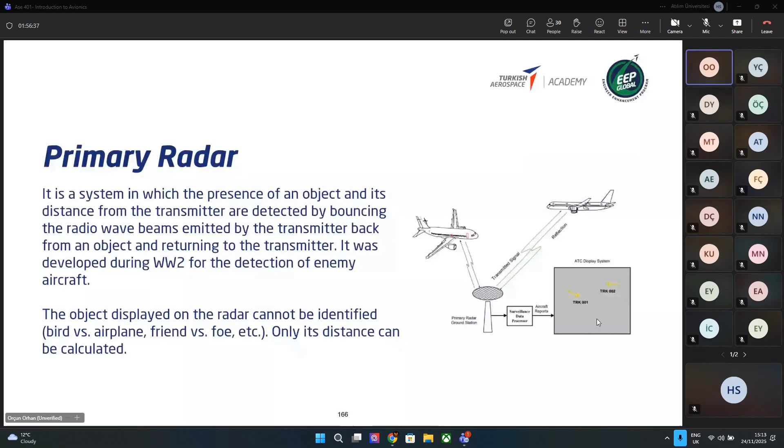As we talked about, the radar sends a signal and receives the signal bounced back from that thing in the air. The ray bouncing off the object doesn't reflect back in a straight line, but spreads out. This reduces the amount that the transmitter part of the radar actually receives. The beams returned to the radar section are called the backscatter—whatever you are receiving back is the backscatter.

When designing an aircraft, you design according to how much it's going to reflect beams. If you're designing a military aircraft, you want it to not be seen on the radar, so you don't want a round shape—you want designs that reflect the beams in other directions so they don't bounce back to the radar. But in civil aviation, you're trying to design an aircraft that can be seen on the radar. That's why civil aviation aircraft are much more round shaped, so these beams are much more reflected back to the transmitter side.

As we already said, the secondary radar also has information about what the object in the air is. There's a transponder system, which stands for transmit and response—a combination of two words. The biggest difference with secondary radar is the presence of a transponder in your system. This time you send information to the aircraft, and it receives it and sends information back to you. This is why it's known as identification of friend or foe, because with this information you can understand if it's an enemy or a friend.

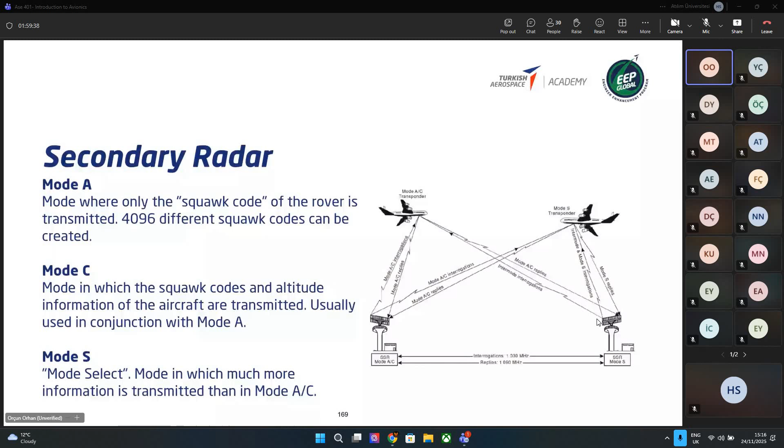This is a mode developed by the International Civil Aviation Organization. It allows a 24-bit address to be assigned to the aircraft, so 16 million different addresses can be assigned. For squawk codes, there could only be 4,096 different codes assigned. If there's more aircraft in the air at the same time than that number, you cannot assign different numbers to each aircraft—you cannot define them or understand which aircraft is which. But with Mode S, you can assign more than 16 million different address numbers, so there's more than enough for your system to understand who is in the air right now.

When an aircraft reports a flight, it will always be assigned an individual code that cannot be changed during the flight. This code makes it easier to recognize the aircraft at every point.

So there are two different types of information provided through these transponders. The first one is the baseline surveillance variables. It defines the minimum criteria that any aircraft wishing to fly in European airspace must meet, regardless of whether the aircraft is fixed wing, rotary, whatever it is.

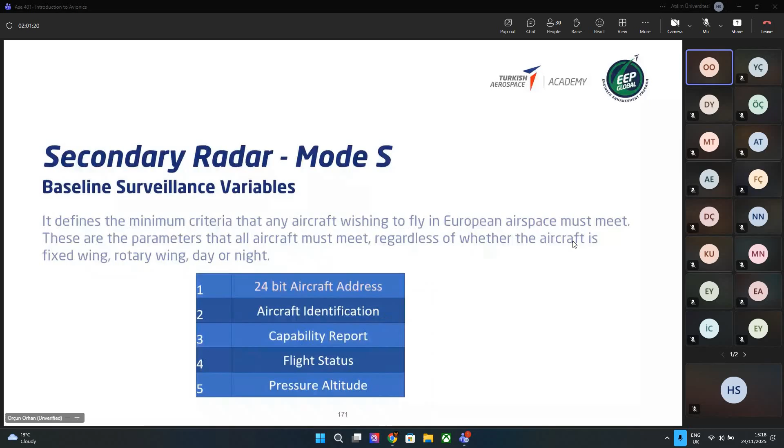The first one is the 24-bit aircraft address that we already mentioned. There are 16 million different addresses that you can create with the system, and this is assigned to an aircraft specifically, so the same number cannot be assigned to another aircraft at the same time.

The second information is the aircraft identification. This is an 8-character flight code entered in the transponder by the flight crew via the control units. This could be different from the 24-bit aircraft address assigned through the system. It comes from the aviation company that's providing this information.

The capability report is the message at the end of the interrogation at the ground station that shows whether the transponder has advanced or beginner level surveillance capability. Right now, this is the baseline surveillance you're just sending. If you're only sending these 5 pieces of information, it means this is the beginner level surveillance capability. But if you're sending more information, which we'll see in a minute, it will be the advanced level of surveillance.

This is the flight status. This shows whether the aircraft is on the ground or in the air. If it is on the ground, the system doesn't try to get and send information to the aircraft because it's not in the air. So it just makes it easier to communicate with the other aircraft.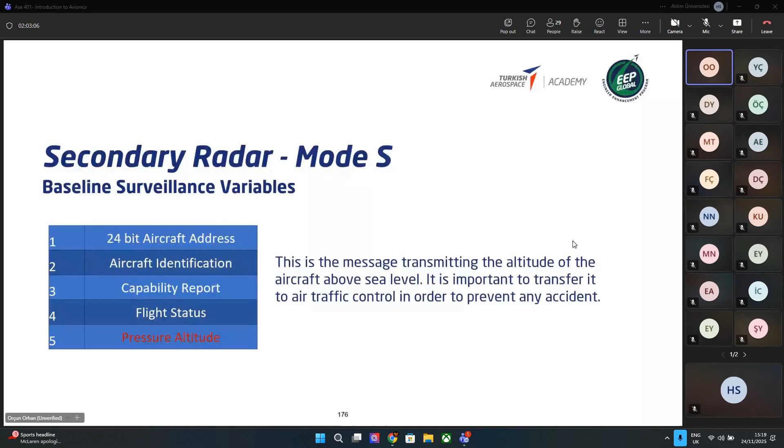And this is the pressure altitude. This is the message transmitting the altitude above sea level of the aircraft. So if you're sending these 5 pieces of information, these are the baseline surveillance variables, and you can get those informations.

The first information comes from the transponder because it will automatically give an address value to the aircraft. The aircraft identification comes through the control panel, where the flight crew enters that identification number through the system. The capability report, again, comes from the transponder, indicating whether it's the baseline or the advanced one.

Flight status comes from the landing gear. If the landing gear is open, it means the aircraft is on the ground. If it is closed, it means the aircraft is in the air. And the pressure altitude information comes from the ADCs, the air data computers.

The advanced surveillance variables apply if an aircraft entering European airspace has a maximum takeoff weight of more than 5,700 kilograms or a maximum cruising speed of more than 250 knots. Then it must meet the criteria of the advanced surveillance variable, meaning it needs to give more information through its transponder.

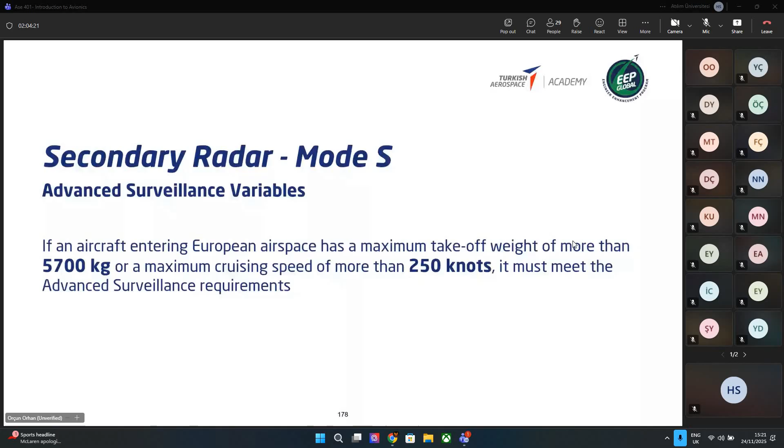The first five will be the same as the baseline, the basic ones. And then the other ones will be the magnetic direction, which is the angle of the nose of the aircraft according to magnetic north.

The Mach number that we already calculated with our ADCs, the Mach number of our aircraft at that time. The indicated airspeed is one of the airspeeds we already talked about. The vertical change is how much altitude the aircraft is gaining or losing at that time. Roll angle is the angle according to its roll axis, so how much the aircraft is rolled at that time.

Course angle change is the rate of change in the angle of the aircraft ground speed vector with the geographical north. Track angle is the angle of the aircraft ground speed vector with, again, the geographic north. Ground speed is the speed of the aircraft according to the ground.

The selected altitude is the altitude data assigned to the waypoints the aircraft is going to go through according to its navigation. There are some waypoints the aircraft needs to reach, and these are the altitude levels they're going to be at those waypoints. This information is needed for the control towers because they're going to know at which points the aircraft is going to reach which altitude level, so they can prevent collisions in the air.

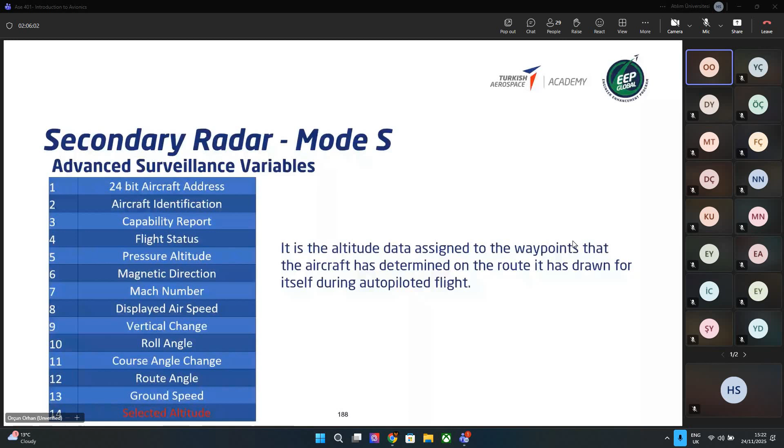All that information is coming from different parts of the subsystems in our aircraft. The first five were already talked about. The magnetic information comes from the GPS or INS in the aircraft, like the Mach number and speed information. The vertical speed information comes from the ADCs. The roll angle can also come from the INS systems or GPS systems. The other four pieces of information can come from the INS, GPS, or the flight management systems in the aircraft.

The last section will be the autopilot, so we will just go through it quickly, and then we will finish the course.

The general purpose of the autopilot is to control the aircraft so it can move on a set course without any control by the pilot. What we're trying to do is minimize the task assigned to the pilot, because on a long flight the pilot is always trying to fly the aircraft itself, looking at all this information and making decisions. It's a really hard task, or it was in the past. With autopilot systems, we're trying to decrease the task assigned to pilots, so they can focus more on information instead of controlling the aircraft. If there's any failure or situation where the pilot needs to directly control the aircraft, control is given back to the pilot. But instead of having all those controlling issues throughout the flight, most systems, like the autopilot system, are going to control the aircraft.

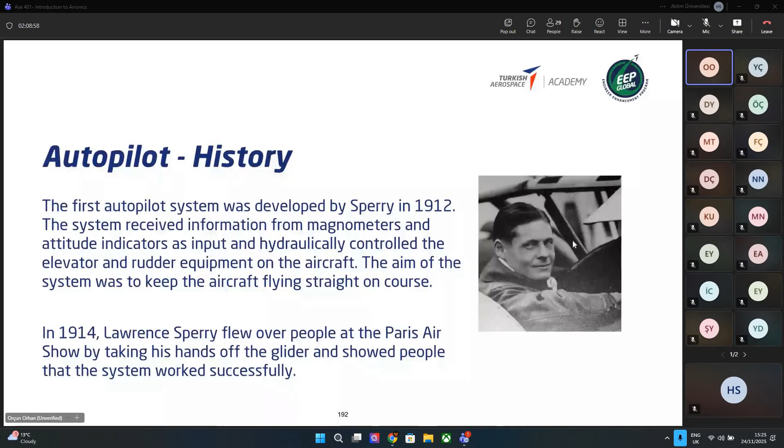This is the history of the autopilot. In the 1930s, with Sperry autopilots, airplanes could fly for 3 hours without deviating from their route. In 1933, American fighter pilot Wiley Post completed navigation around the world in 8 days using autopilot systems. These are some of the historical milestones of how the autopilot evolved through history.

What's also important for the autopilot is the instrument landing system, which was developed together with the autopilot systems. The leading company is a UK-based company, because in the UK there is rainy and foggy weather most of the time. That's why companies tried to establish instrument landing systems that could make landing easier for aircraft, because if it's raining or foggy, it's harder for pilots to land by themselves. These instrument landing systems help pilots land the aircraft.

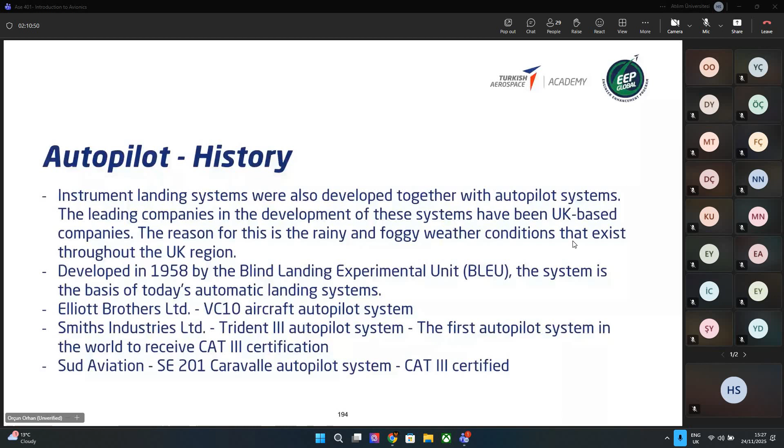For an autopilot, there should definitely be a fly-by-wire system. In Lawrence Sperry's aircraft, there wasn't any fly-by-wire; all the systems were controlled mechanically. But nowadays there are too many systems in an aircraft, so there needs to be a fly-by-wire ecosystem to control all the surfaces and everything inside the aircraft. All the mechanical systems have been replaced by electronic systems nowadays, so the flight control computer controls the control surfaces with electrical signals only, according to the incoming commands.

So how we are actually doing it is there's control sticks, rudder pedals in the cockpit area. Through those sticks, you're trying to understand how much input the pilot is going to give to your system, and you sense it through those sticks. Then you create an electrical signal according to those stick movements and send those to your control surfaces or motors, wherever, whatever you're trying to do in the aircraft. Then those subsystems actually try to control the aircraft. The pilot is not mechanically controlling the aircraft anymore, just telling the aircraft how much it's going to, for example, pitch down through that stick control, and the rest is done by the electrical controls in the aircraft.

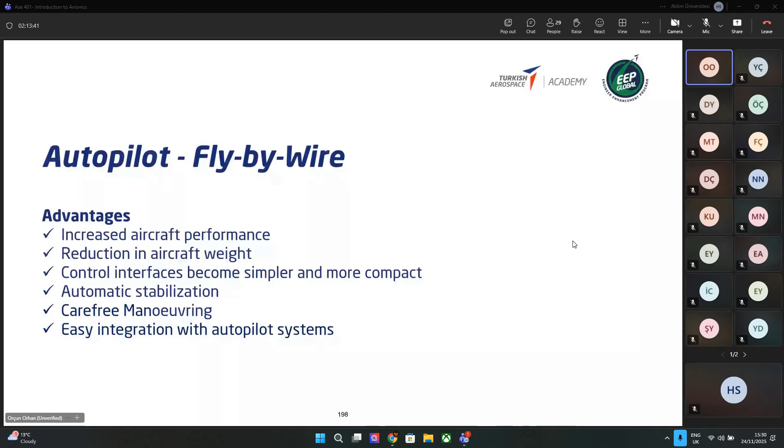So what is the advantage? Of course, increased aircraft performance, because if you try to control it mechanically, it's really hard, especially in big aircraft. It's much easier to control the aircraft by fly-by-wire system, so that's why it's increased aircraft performance, and reduction in aircraft weight. Why do we say that? Because all these mechanical systems used in the past get rid of that weight from the aircraft. Instead of mechanical controls, we have electrical controls, which have less weight, so it reduces the total weight of the aircraft. Control interfaces become much simpler and more compact. Instead of having control mechanisms between the cockpit and the control surface, you just have wire systems, data systems that fly through. So it's much simpler. Automatic stabilization and carefree maneuvering are also advantages of fly-by-wire systems.

We also have fly-by-light systems, but the difference between fly-by-wire and fly-by-light is the cabling. If the cabling inside your aircraft is made of fiber optic cables, then you are using a fly-by-light system instead of a fly-by-wire. As I said, the only difference is the wiring. If the wiring is fiber optic, then your system is called fly-by-light. The advantage is again the weight, because fiber optic cables have less weight than the normal cables used in aircraft.

I'm not going to talk about the control surfaces part. You're already familiar with those because you always have courses about control surfaces, so I will not talk about those.

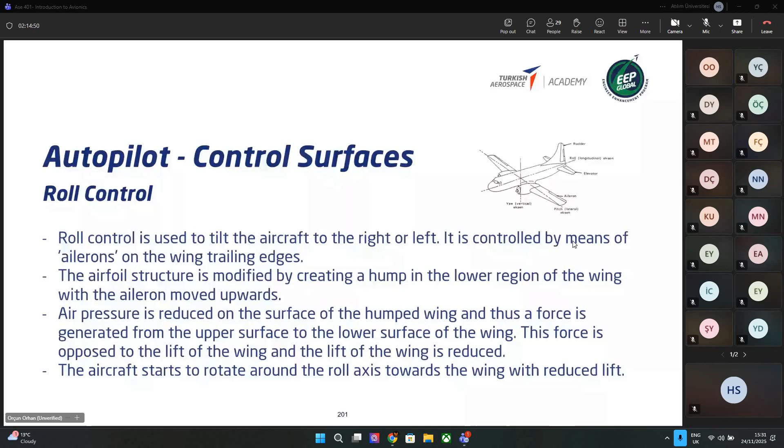So for the control part, the autopilot's task is to ensure that the aircraft reaches the specified position using the control surfaces. There are two control loops. The outer loop is the autopilot system calculating the changes that need to be made on the control surfaces to reach the specified position and transferring them to the inner loop. The inner loop controls the changes in the control surfaces with the values it receives from the outer loop. It has a faster response than the outer loop.

So the outer loop calculates how much they need to change the control surfaces to reach a desired position. The inner loop gets that information as an input and tries to use it to control the control surfaces to the desired output values. These are some of the schematics shown for the altitude control for the inner and outer loops.

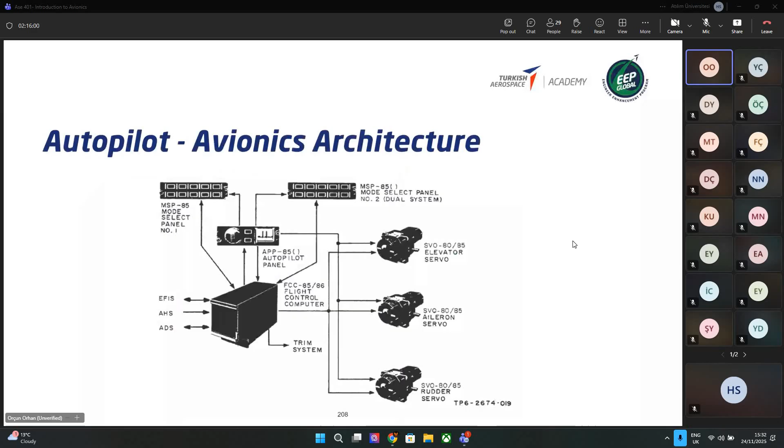So we will move on. What are the functions of the autopilot? The protection of the barometrically calculated altitude - if you give an altitude level to your autopilot system and tell it to hold it, even if the aircraft somehow, for some reason, decreases or increases its altitude, it will try to level the aircraft at the same altitude. Maintaining the vertical speed - whatever speed information you give to the autopilot, it will try to continue at that speed, neither decreasing nor increasing. Achieving and maintaining a predetermined barometrically calculated altitude - if at one waypoint you want a desired altitude level, the autopilot will try to make the aircraft reach that altitude level.

Achieving and maintaining predetermined heading alignments, capturing and maintaining a predetermined radio route. So what the autopilot is actually doing - you give a route to the autopilot system, you want your aircraft to follow that route. The autopilot tries to follow it according to the flight envelope of your aircraft. It also knows the limitations of your aircraft, so it doesn't try to go outside of that envelope, but stays within the limits of the aircraft and tries to follow the route you specified for the aircraft during its flight.

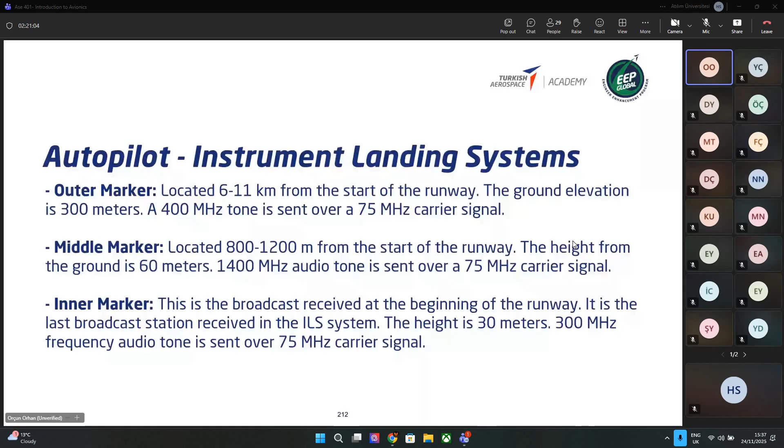What CAT 1 does is get the aircraft to the outer marker by autopilot, and then after the outer marker, it gives control to the pilot. The decision altitude, as you can see, is 61 meters. After the outer marker, control is given to the pilot, and the pilot lands the aircraft by itself.

If your autopilot has a CAT 2 certification, it gets the aircraft to the middle marker, then gives control to the pilot after the middle marker. But if you have a CAT 3 certification, it can actually land the aircraft by itself. According to the subcategories A, B, C, it gives control to the pilots in different sections.

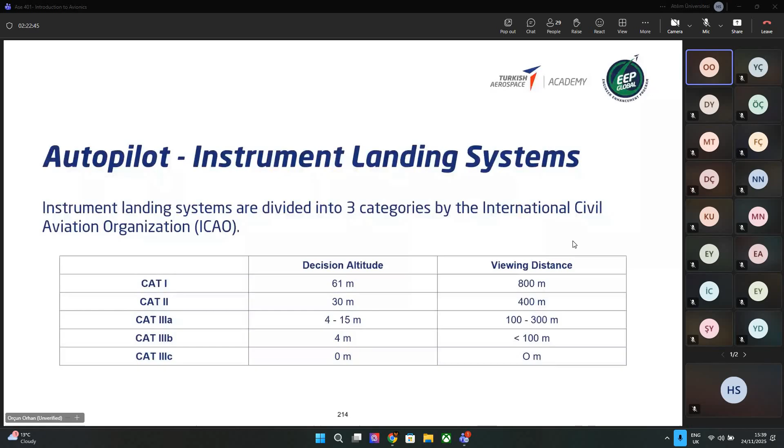For fully automatic landing, CAT 3A will just pass control to the pilot after landing. For CAT 3B, after landing it will start traveling on the runway and then give control to the pilots. But for CAT 3C, it should do all the taxi and then park the aircraft fully automated, landing, taxiing, and parking.

But there is no system right now that has a CAT 3C certification, so no autopilot is used after landing to do the taxi and parking of the aircraft. CAT 3A and 3B certification does exist, so there are autopilots that can land an aircraft by itself without giving control back before the landing.

So this is like the fully automatic landing systems. We will not go into detail about those, let's try to finish the course.

The last part will be the flight management systems. This assists the flight crew by reducing the tasks they need to perform during flight, for economical benefits. First is optimizing the aircraft performance along the route and saving fuel, then increasing air traffic density and 4D navigation.

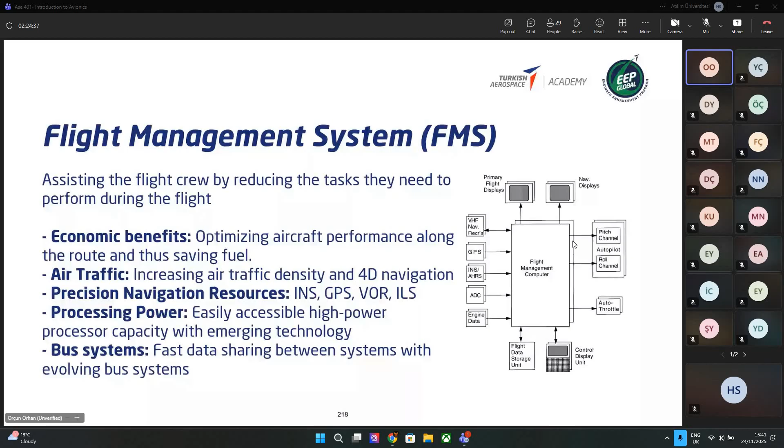Precision navigation resources from the INS, from the GPS, VOR or ILS, processing power with easily accessible high-power processor capability, and bus systems with fast data sharing between systems and evolving bus systems.

The task is the lateral and vertical position control of the aircraft, calculating optimum aircraft speed at each stage. You can think of it like an autopilot section, because what we said for the autopilot is that it tries to follow a route that you have given to the aircraft to follow.

What the flight management system is actually doing is, in an economical way, it will try to follow all those routes and calculate what is possibly the most economical flight in terms of flight time.

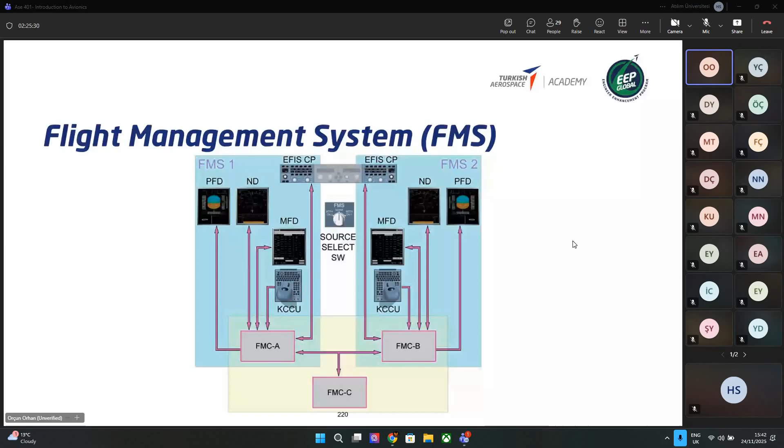The last important part is the 4D flight management, because 3D is for position and 1D is for time, and time is really important for flights, especially for civil aviation, because there are many aircraft in the air at the same time, and every company depends on the aircraft reaching their final destination on time.

So flight management is really important, and this is what the flight management system is doing. It will try to calculate the minimized time to reach the destination point, and give the pilots and ground stations information on when the aircraft is going to reach that destination, which is really important for air traffic control.

Today, with closed loop flight control, 95% of flights have only about 48 seconds of arrival deviation. This isn't just the company giving you a time of arrival - this is the aircraft calculating it by itself with its flight management system, using all these conditions like fuel condition and route information, to determine when it's going to arrive at the destination. This is important information for the aircraft, for the pilots, and for the ground stations for air traffic control.